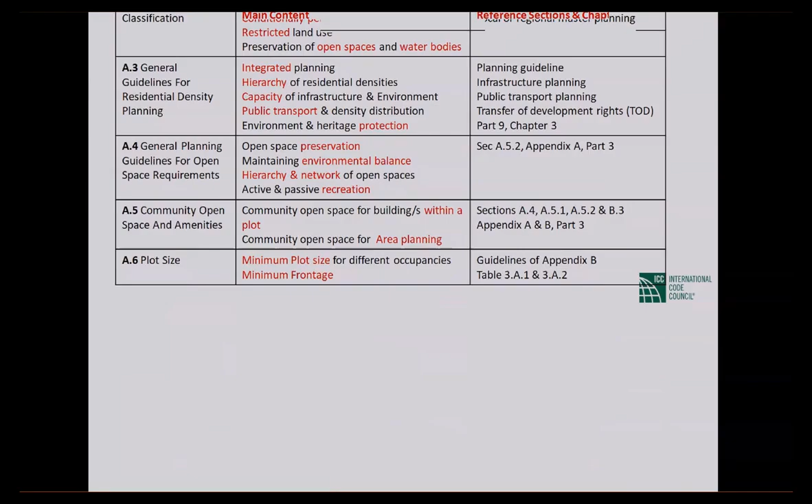But this is a standard procedure, and BNBC works along with other laws of the land and other policies of the land, and they are all in compliance, and it is an integrated component of a larger scenario. So we have a land use policy in our country, and there are different regional and local master plans done by different authorities, government agencies. So the first two sections refer to those references, and we'll go into detail to understand how they refer. So let's go for the discussion of each of the sections in detail.

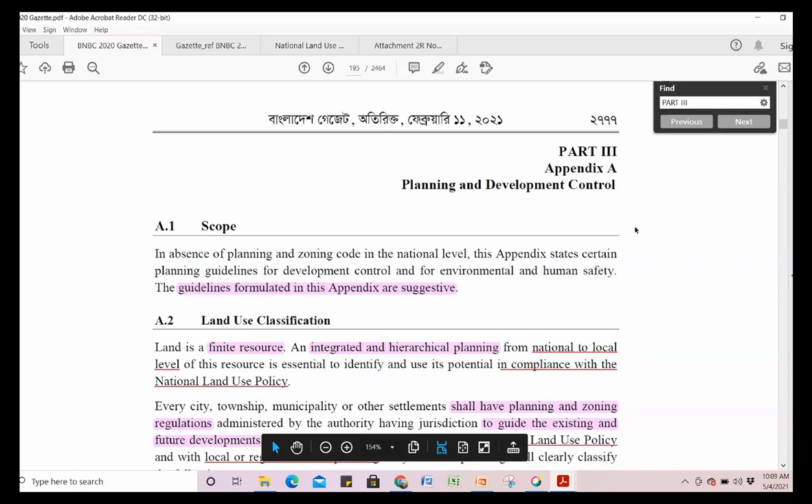So this is Part 3, Appendix A of BNBC 2020. We will be discussing planning and development control. So the scope at the very beginning defines that there should have been a planning and zoning code. Since it is not there, in absence of the planning and zoning code at national level, this appendix states certain planning guidelines for development control and for environment and human safety. The guidelines formulated in this appendix are suggestive. So this is the building code, not a planning code.

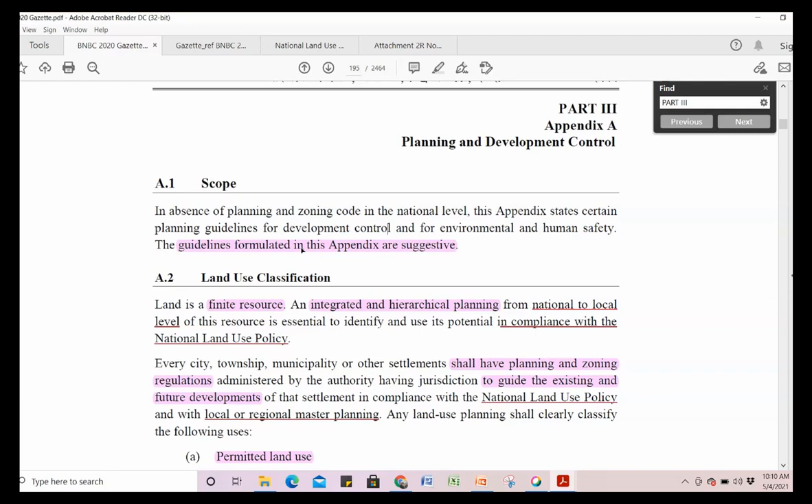And if there had been a planning code here, probably this part would have been covered by the planning code. In absence of that, the BNBC suggests certain guidelines here.

So now about the land use classification. There are a few statements that are very important for a country like Bangladesh. It's quite a populous country with limited resources. So land is one of the resources, and at the very beginning we declared that this is a finite resource. So an integrated and hierarchical planning from national to local level of this resource is essential to identify and use its potential in compliance with the national land use policy.

So this is a primary goal, that we have to use this resource judiciously, and it has to be a very integrated and hierarchical planning, and it has to comply with the national land use policy.

So every city, township, municipality and other settlements shall have planning and zoning regulations administered by the authority having jurisdiction to guide the existing and future developments in compliance with national land use policy and with local or regional master planning.

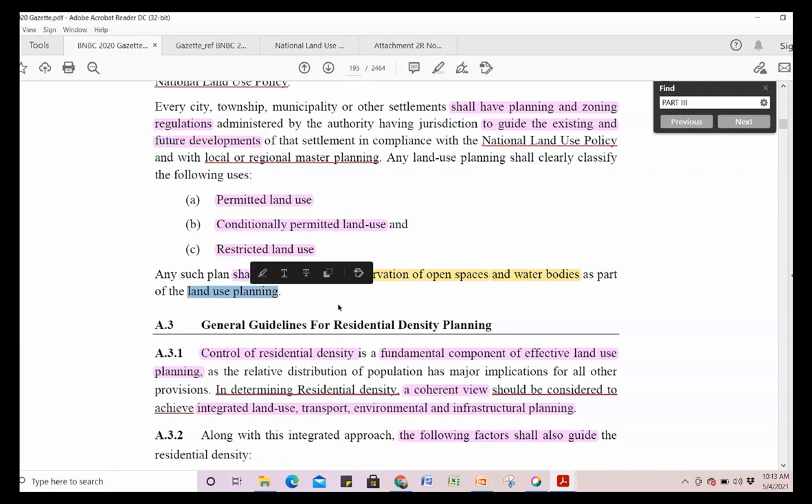So there are three types of uses which are required to be mentioned in the planning guidelines. One is permitted land use, the second one is conditionally permitted land use, and the third one is restricted land use. But that's not all. Any such plan shall also include the preservation of open space and water bodies. So this is an additional criteria that must be met in any land use planning. So this is the basic part of land use classification.

Then we go for the general guidelines for residential density planning. Control of residential density is a fundamental component of effective land use because the relative distribution of population has major implication for all other provisions. So in determining residential density, a coherent view should be considered to achieve integrated land use, transport, environmental and infrastructure planning.

So there must be an integrated approach which will create a balance between transport, environment, infrastructure planning, and residential densities. Along with this integrated approach, the following factors shall also guide the residential density. A, a hierarchy of residential densities should be maintained to ensure diversity of housing needs.

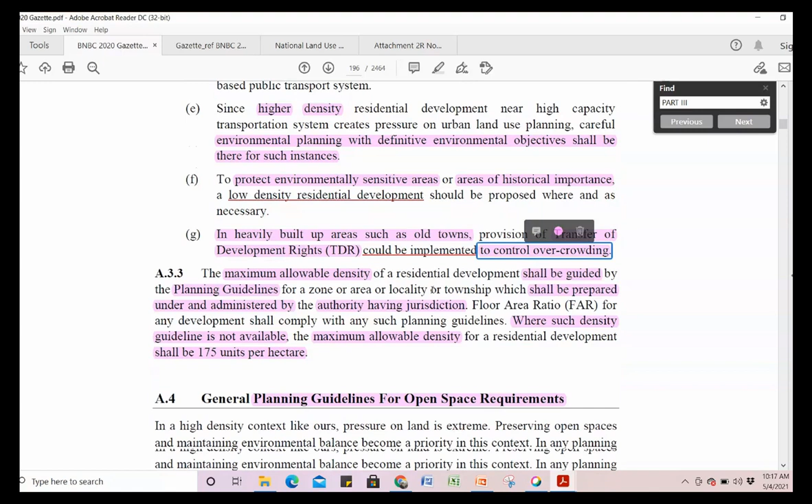So there is an indication of density distribution, where the higher densities will be and where the lower densities will be. In heavily built up areas such as old towns, provisions of transfer of development rights (TDR) could be implemented to control overcrowding. So these are the general guidelines for distributing residential densities, and there is just another guideline for it.

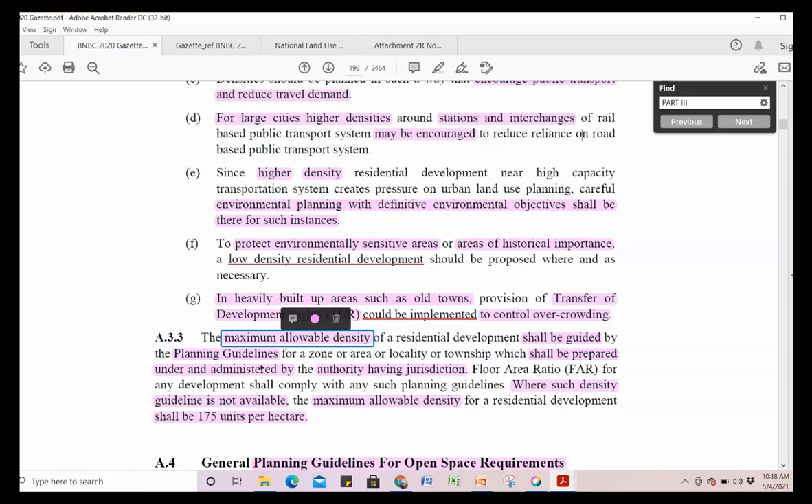The maximum allowable density of a residential development shall be guided by the planning guidelines for a zone or area or locality or township, which shall be prepared under and administered by the authority having jurisdiction. So actually it is the authority having jurisdiction who will decide what will be the maximum allowable density for a locality or for a zone or area or township.

Floor area ratio, FAR, for any development shall comply with any such planning guidelines. Where such density guidelines are not available, maximum allowable density for a residential development shall be 175 units per hectare. So there is a baseline. If we don't have any other guideline present for referring to that development, we will consider this density guideline as a reference for our development.

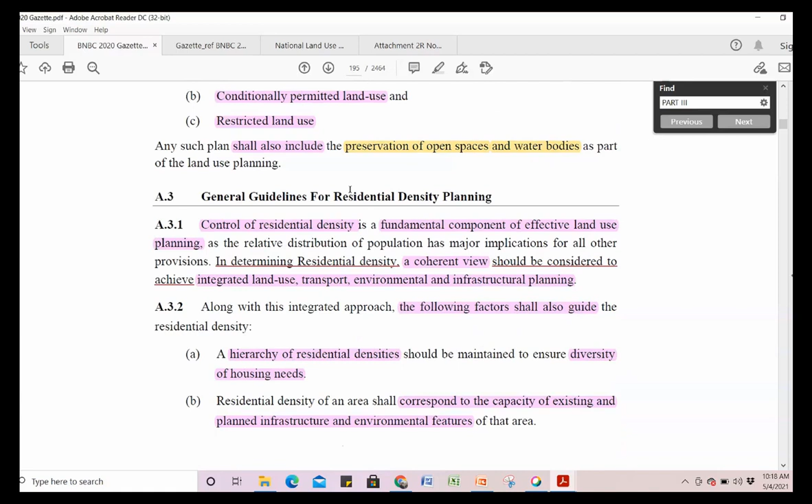So as we all know, these are the density distribution guidelines for residential densities. Now comes the open space guidelines, general guidelines for planning open spaces. I think the whole para makes sense, so I'll go line by line for this part at least.

In a high density context like ours, pressure on land is extreme. Preserving open spaces and maintaining environmental balances become a priority in this context. In any planning process, open space must be planned as a land use in its own right. So although apparently open space is not a dedicated defined land use, here it is stated that open space must be planned as a land use, and not as the remainder after providing the other land uses. So it has to be a focus of the planner while planning the settlement or an area or a master plan.

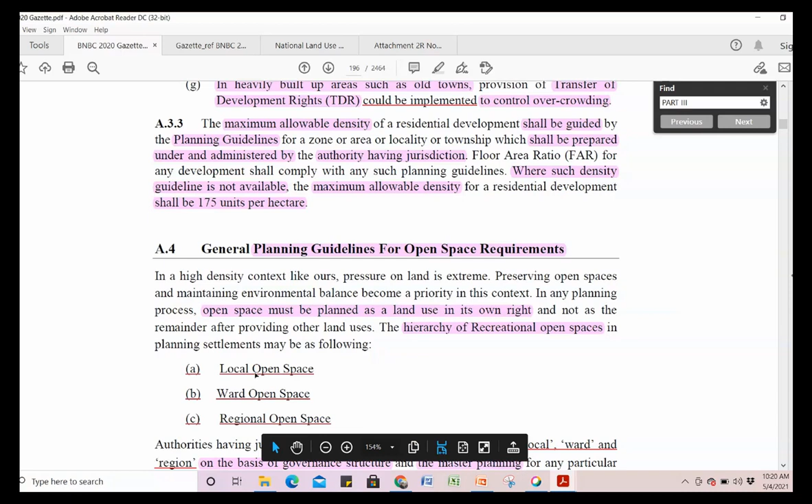The hierarchy of recreational open spaces in planning settlements may be as follows. There are three types of open spaces: local open space, ward open space, and regional open space. Authorities having jurisdiction shall determine the extent of the terms local, ward, and region. So these are a bit flexible. The authority will define which area should be designated as local, ward and region, but it is not totally free. They will do it on the basis of governance structure and the master planning for any particular area. So there are references on the basis of which they will define the extent of a locality, a ward and region.

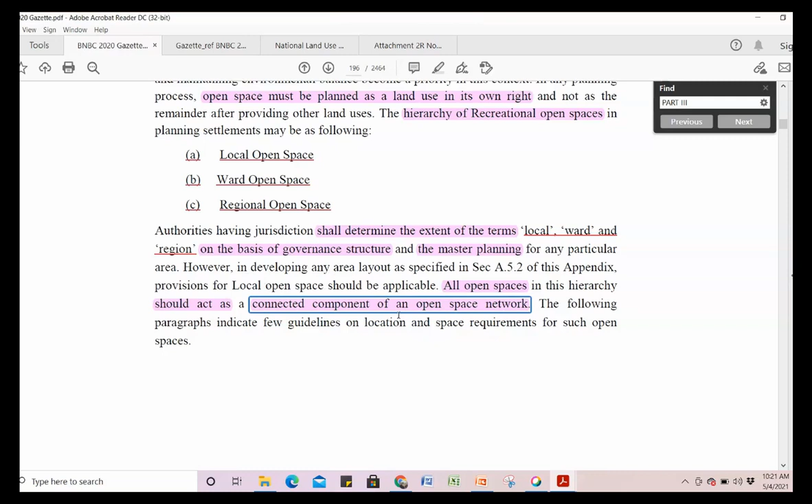So all open spaces in this hierarchy should act as a connected component of an open space network. They are not independent and disconnected, disjointed. They must be planned so that they are also a part of an open space network. That is another guideline for open space requirements. So let's go into detail for each of the open spaces.

For local open space, every locality should have local open space, which is required to meet primarily the passive recreational needs like outdoor sitting, jogging, walking tracks, playgrounds for children, etc. These are all passive recreational needs of the population. Such spaces should be located either within the residential neighborhood or somewhere centrally to serve a wider area of more than one neighborhood. So as we can understand, they are relatively smaller in scale, located within the locality, and there are a few guidelines about the space requirements here.

Considering the projected future population of a locality, and we must notice that it is the projected future population, not the existing population, a minimum requirement of 1 square meter of local open space per locality occupant should be allotted. So this is the basic guideline for a new development. This has to be followed, but where it is already a built-up situation, if possible, such open spaces should be at least 500 square meters. Even in newer localities, it can be a parcel of 500 square meters, or multiple parcels of 500 square meters. So it is suggested that it should be at least 500 square meters or more.

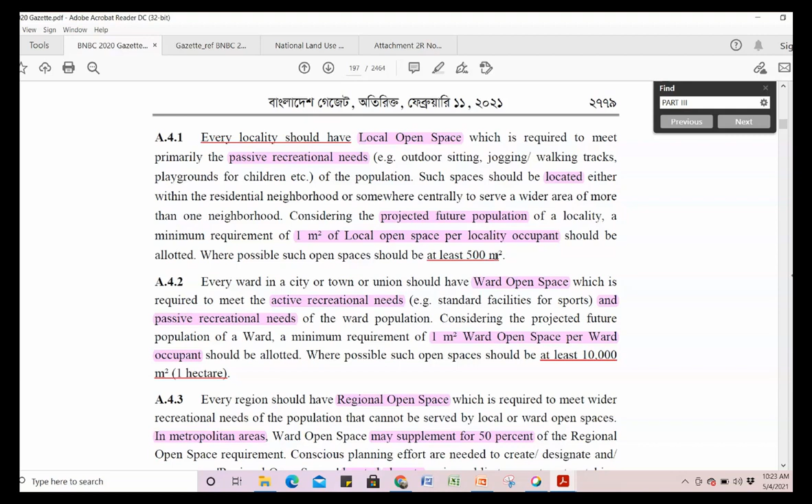So what is ward open space? Every ward in a city or town or union should have ward open space, which is required to meet the active recreational needs, that is standard facilities for sports, and also passive recreational needs for the ward population. So in the hierarchy, it is a bit larger space for the whole ward, and the space requirement is similar. It is 1 square meter of ward open space per ward occupant, and 10,000 square meters or 1 hectare is the minimum size for ward open space.

And for the regional open space, every region should have regional open space, which is required to meet wider recreational needs of the population that cannot be served by local or ward open spaces. In metropolitan areas, ward open spaces may supplement for 50% of the regional open space requirement. So it is a flexibility and exception that in metropolitan areas, ward open space and regional open space may overlap. They can supplement each other.

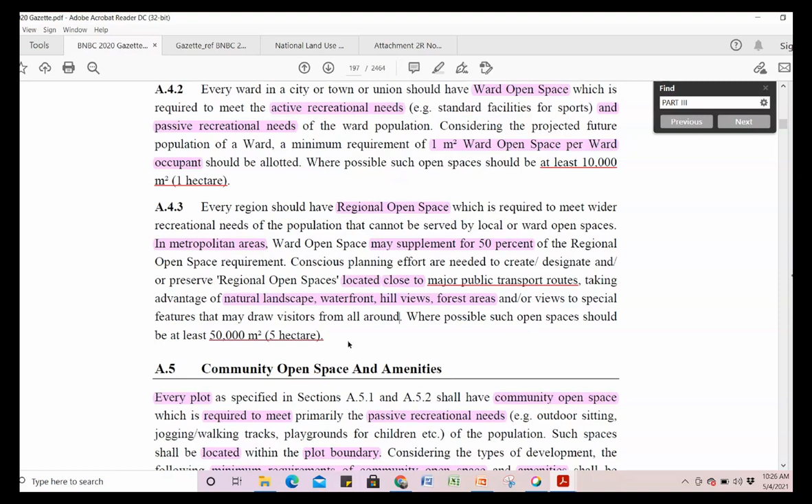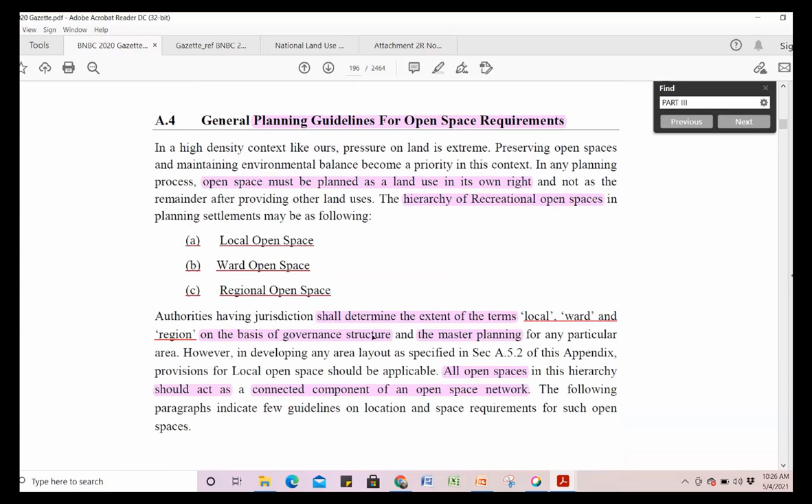So they are also serving our recreational purposes, but of a different kind, not served by the local open space or ward open space. Where possible, such open spaces should be at least 50,000 square meters, 5 hectares. This is the minimum size. Of course, it can be much larger. So these are the 3 types of open spaces which should be placed in a hierarchy for a larger planning scenario. Now comes the open space criteria within a plot.

It is community open space and amenities. So every plot as specified in sections A5.1 and A5.2 shall have community open spaces which are required to meet primarily the passive recreational needs, outdoor sitting, jogging, walking tracks, playgrounds for children of the population. Such spaces shall be located within the plot boundary. So this is about each individual plot development.

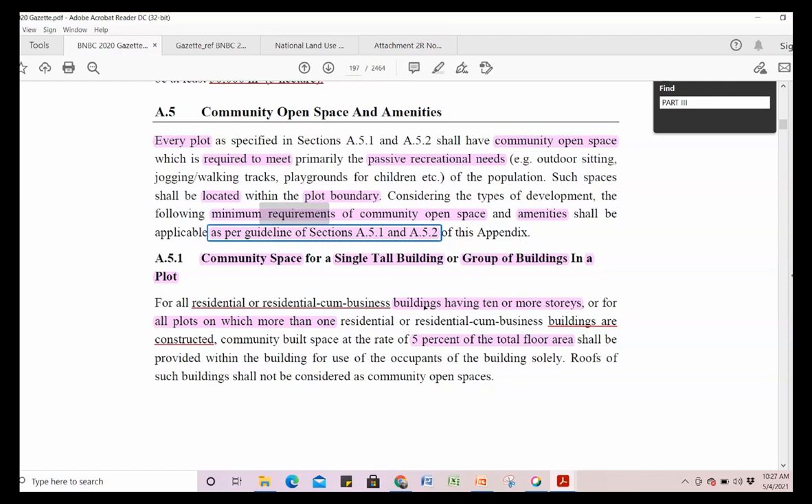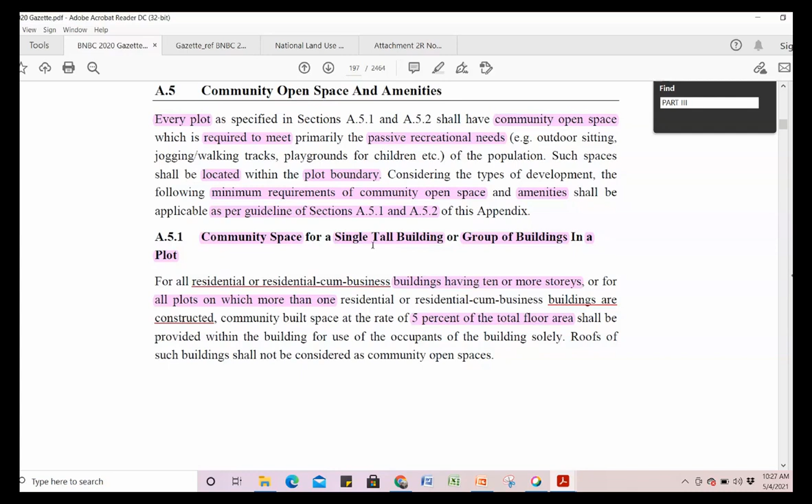Considering the types of development, the following minimum requirements of community open space and amenities shall be applicable as per guidelines of these sections. So let's go through the sections. A.5.1, community open space or community space for a single tall building or group of buildings in a plot. For all residential or residential cum business buildings having 10 or more stories, or for all plots on which more than one residential or residential cum business buildings are constructed, community built space at the rate of 5% of the total floor area shall be provided within the building for use of the occupants of the building solely. Roofs of such buildings shall not be considered as community open space.

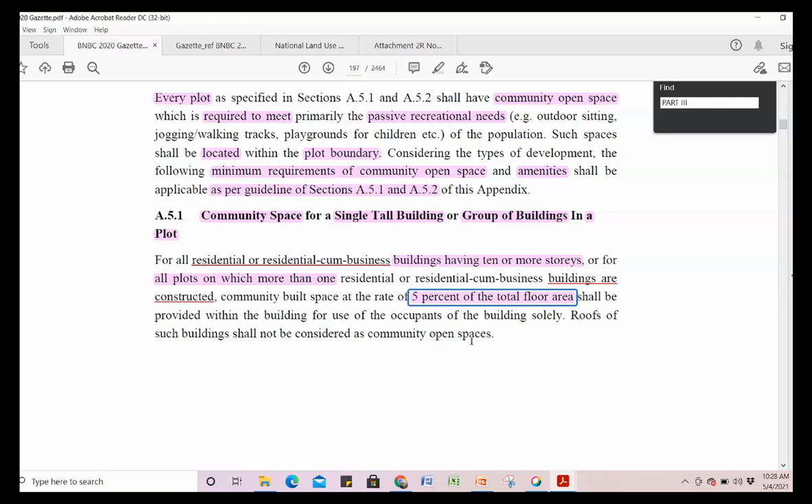So this is mostly focusing on a plot and tall building or relatively higher density development or mixed use development. So that is the guideline for the community open space for such developments. For residential or residential cum business plots measuring more than 0.1 hectare. So there is a size mentioned. These are relatively larger plots. So 0.1 hectare, it has to be more than 0.1 hectare.

10% of the area of land or 1 square meter per occupant of the plot, whichever is larger, shall be left vacant for use as a children's playground. This playground shall be contiguous and shall have a length not exceeding 2.5 times its width. The playground may extend into the mandatory open space of the lot. So relatively larger plots will have a different guideline for community open space, and that is guided by two criteria. One is 10% of the area of the land or 1 square meter per occupant, whichever is larger, will be needed for community open space. And this particular open space can overlap with the mandatory open space or setback areas.

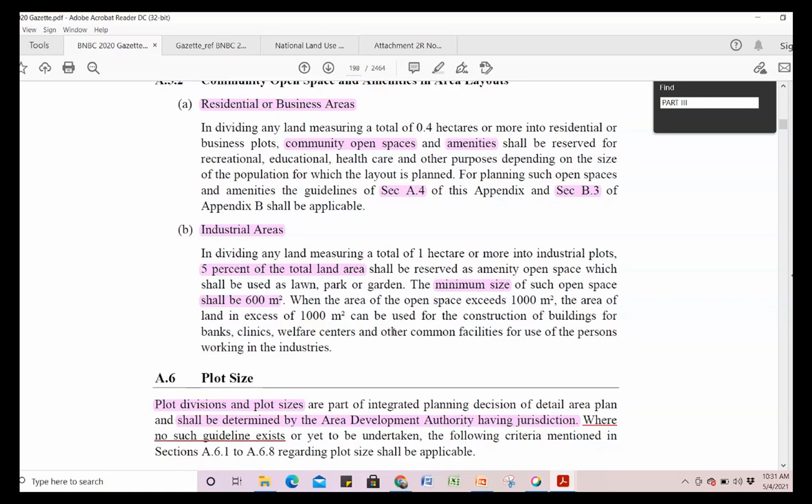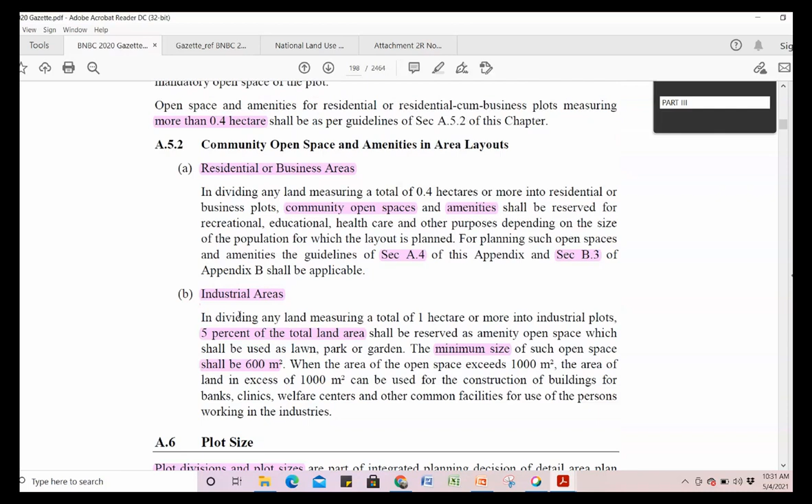Where the area of the open space exceeds 1000 square meters, the area of the land in excess of 1000 square meters can be used for the construction of buildings for banks, clinics, welfare centers, and other common facilities. So there are two separate guidelines for larger plots: one is for the residential and business situation, and the other is for the industrial situation. So that ends the planning part.

Now we are going to individual plot size. So plot divisions and plot sizes are part of integrated planning decisions and shall be determined by the area development authority having jurisdiction. Where no such guidelines exist or are yet to be undertaken, the following criteria mentioned in sections A6.1 to A6.8 regarding plot sizes shall be applicable. So about the residential plots,

Something is wrong with this color. Okay, it's here now. So A1 relates to 66 square meters, A2 133 square meters, and A3 is 200 square meters. This is the minimum size of the plot respectively. And they also have to have some road frontage.

Can you see the presentation? I think that there are some glitches here. Okay, I'll just stop the screen share for a moment and we'll come back quickly. Well, I think it should be okay by now.

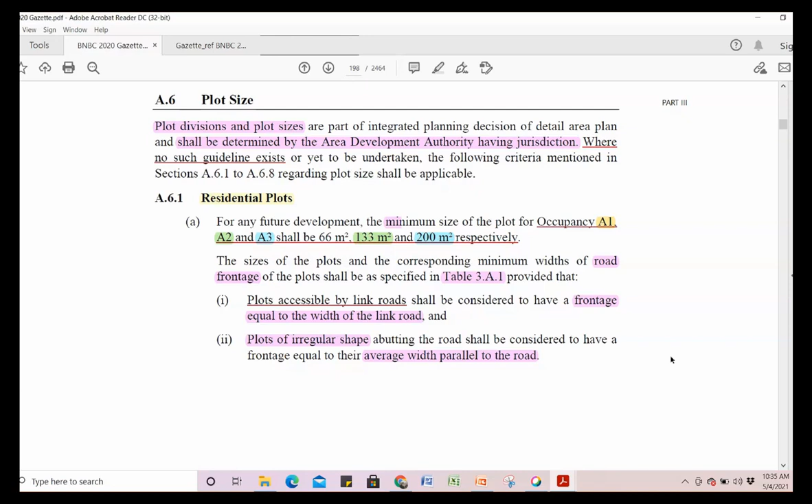So this is, yeah. So these are the three occupancy types and their respective plot areas, which are to be abided by. And for road frontages, we have to consult table 3.A.1. It is provided there for different plot sizes. We'll go through it. It is just below.

So there are a few additional criteria. These are that plots accessible by link roads shall be considered to have a frontage equal to the width of the link road. Plots of irregular shape abutting the road shall be considered to have a frontage equal to their average width parallel to the road. Okay.

The other criteria are that limitations of plot sizes and frontages imposed in A6.1 above may be waived for the approved affordable housing, including site and service scheme. So this is an exemption for approved affordable housing and site and service scheme. The limitation of plot size and frontages may be waived, but there are other guidelines that will decide how much waiver they will get, and that is given in Appendix B.

The minimum size of the plot for a group housing development scheme and other special requirements for group housing developments shall be as specified or approved by the respective city development authority. So the final guideline for plot size is that for minimum standard transitional housing, government may allow smaller plots following the guidelines mentioned in Appendix B.

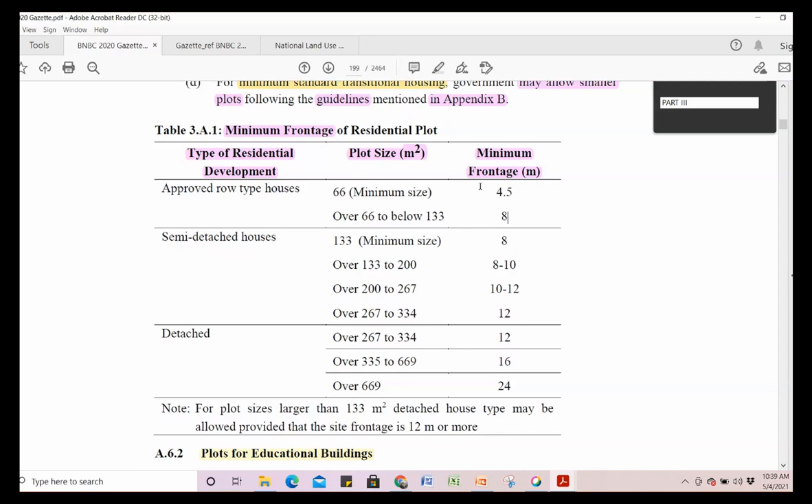So there are three types of residential development: approved row type, semi-detached type, and detached type. There are plot sizes defined for that. Minimum plot size should be 66 square meter, and this particular typology is approved up to 133 square meter, and the required road frontages are 4.5 meter and 8 meter. So this is the basic structure, and it is given for other typologies as well. We are not going into detail, just we should look at the footnote.

Here is a flexibility. As you can see, for semi-detached house there is a minimum size. For approved row house there is a minimum size. But for detached house it is not mentioned whether there is a minimum size or not. So there is a note about it here: that for plot size larger than 133 square meter, detached housing type may be allowed provided that the site frontage is 12 meter or more.

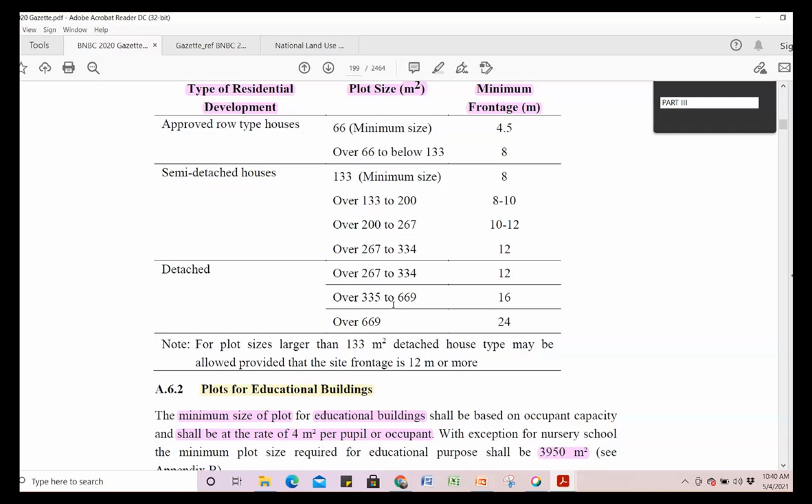So if the site frontage is 12 meter or more, detached housing type may be allowed for plots larger than 133 square meter. So that was applicable for residential buildings.

Now plots for educational buildings. Minimum size of the plot for educational buildings will be based on occupant capacity and shall be at the rate of 4 square meter per pupil or occupant. The minimum plot size shall be 3,950 square meter. Further elaboration is given in Appendix B.

Plot for assembly halls, theatres and cinemas. Minimum size of plot for assembly halls, theatres, cinema halls and other similar buildings where people will gather for entertainment or public functions shall be based on the seating capacity of the building and shall be at the rate of 3 square meter per seat. So there is a table below, table 3.A.2, that gives some more elaboration on this topic.

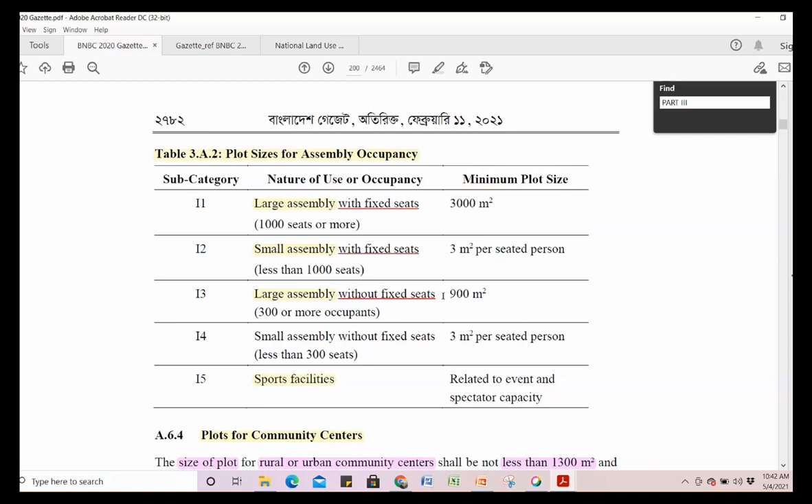This is the table where the subcategories of occupancy I are given. There were 5 subcategories: large assembly, small assembly, large assembly without fixed seats, small assembly without fixed seats, and sports facilities, and the basic standard is 3 square meter per seat. But for sports facilities there are 2 components here. One is related to the event, that is the sports field or area dedicated for sports, and the other is spectator capacity. Spectator capacity will be determined by 3 square meter per seat again. So that is the plot size for sports facilities and assemblies.

For community centers in rural or urban areas, the minimum size of the plot will be 1300 square meter. For business and mercantile plots, the minimum size will be 200 square meter with a road frontage of not less than 10 meters.

So 2 criteria are applicable for business and mercantile plots. One is the road frontage, that should not be less than 10 meter, and the minimum size of the plot will be 200 square meter. For industrial plots, the minimum size of the industrial plots shall be 300 square meter. Road frontage shall not be less than 15 meter. So it needs a higher road frontage, and the minimum size will be 300 square meter.

Petrol and filling stations, the minimum size of the plot will be 500 square meter, and the road frontage shall not be less than 30 meters. The minimum size of the plot for petrol station with service bay but without repair workshop shall be 1100 square meter, and the road frontage width shall not be less than 30 meters. So there are 2 options. One is with service bay but without repair workshop, and the other is without service bay and repair workshop. So there are two provisions for that.

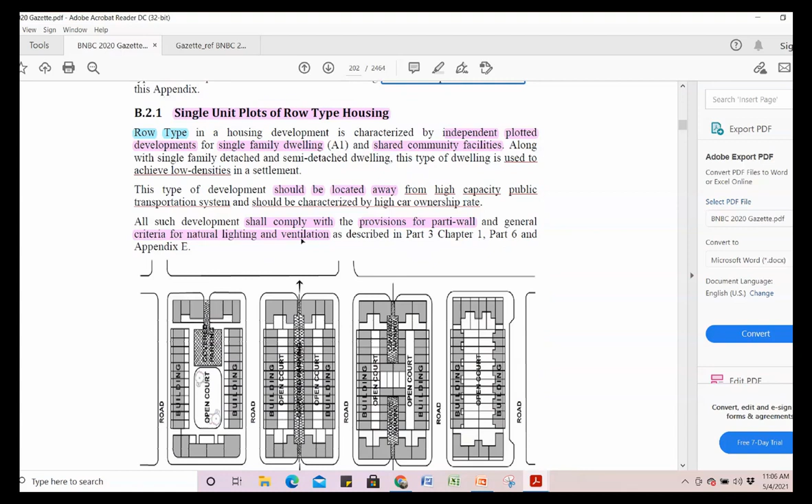So now the elaboration of each type. Single unit plots of row type housing. Row type housing is a housing development characterized by independent plotted development for single family dwelling A1 and shared community facilities, along with single family detached and single family semi-detached dwelling. This type of dwelling is used to achieve low densities in a settlement. So these are the low density development tools for housing.

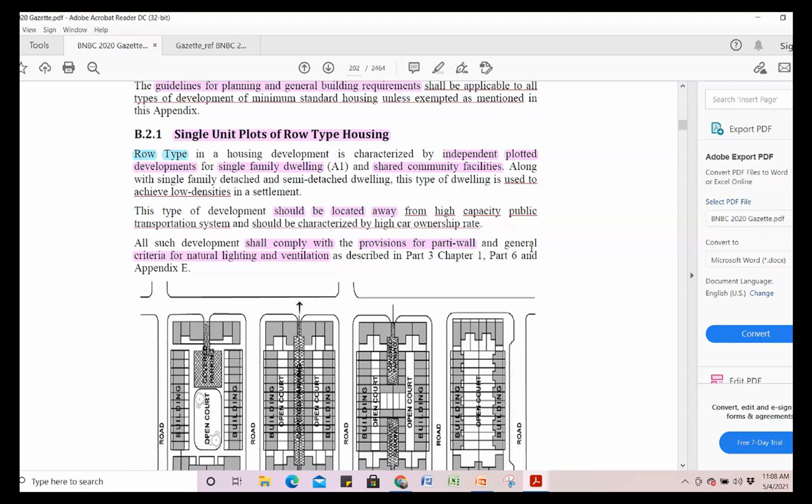This single unit plots or row type housing. This type of development should be located away from high capacity public transportation system and should be characterized by high car ownership rate. As it is a relatively low density development, there is a locational suggestion that it should be located away from high capacity public transportation system and will better be served by high car ownership, so that people will have individual mobility. And of course there will be other public transportation system, but not high capacity public transportation systems.

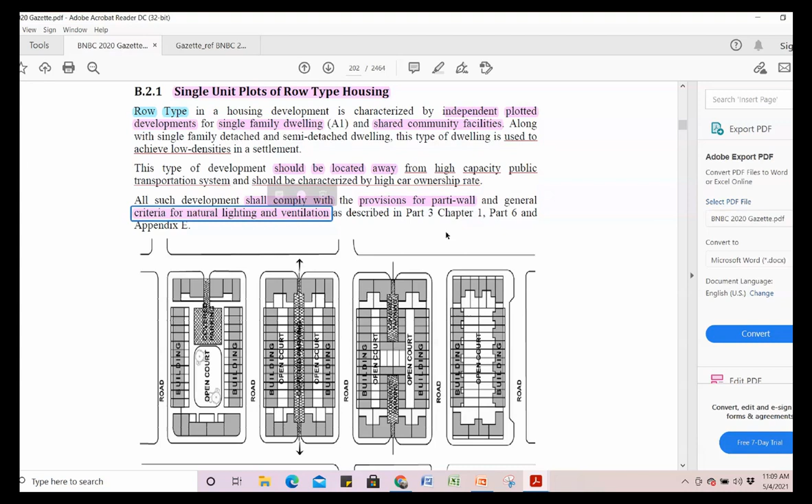So all such developments shall comply with the provisions for parti-wall, a new term for us. We will go through it in the later phase. The party wall will be discussed in further elaboration, and general criteria for natural lighting and ventilation. Since it is dealing with shared wall situation, which is called party wall, there will be additional care for party walls and for ensuring natural lighting and ventilation as described in this code.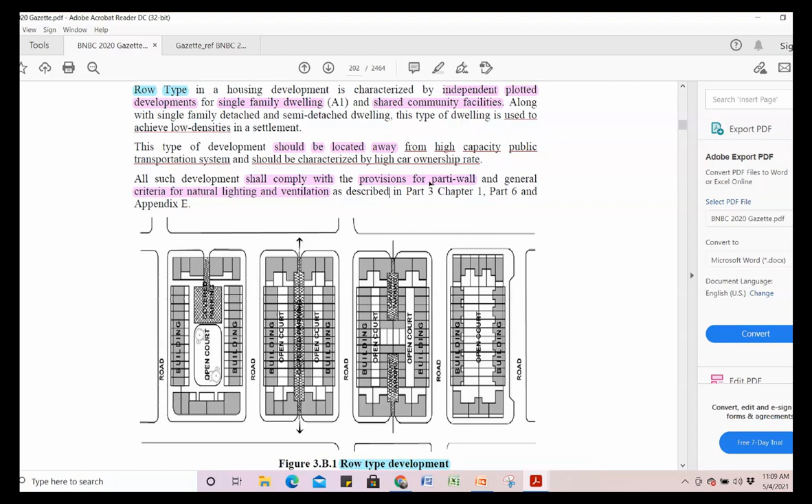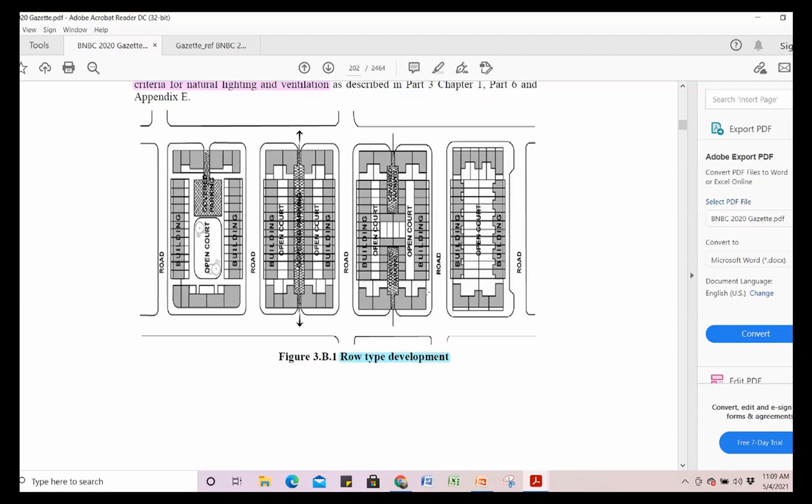So there are few references, Part 3 Chapter 1, Part 6, Appendix E. So they all deal with the construction and natural lighting and ventilation. Those guidelines will be complied by. So this is the general outline for row type development. The grey area, mainly built area. The white area is open spaces and the hatched area is for parking situations. So there might be many possible alternatives for this typology. This is just a suggestive outline.

For multi-storied flats of row house type, but they are not plotted development like the previous one. Here the undemarcated, undivided land is shared by the flat owners within the complex. So this is a different type of development, another row type development, but multi-storied, and it is on a shared, undivided, undemarcated land. Houses or flats or apartments in multi-storied row type development shall share walls with adjacent flat or apartment, provided that they are designed and built at the same period as part of the same project, and also that they fulfill the general criteria of natural lighting and ventilation.

Multi-storied row type development should be permitted for walk-up apartments, A3, as well as two-family dwellings, A2, with many of the community facilities at lower levels. Such developments are good for medium density. So the first one was good for lower density. This will have a little bit more density, medium density.

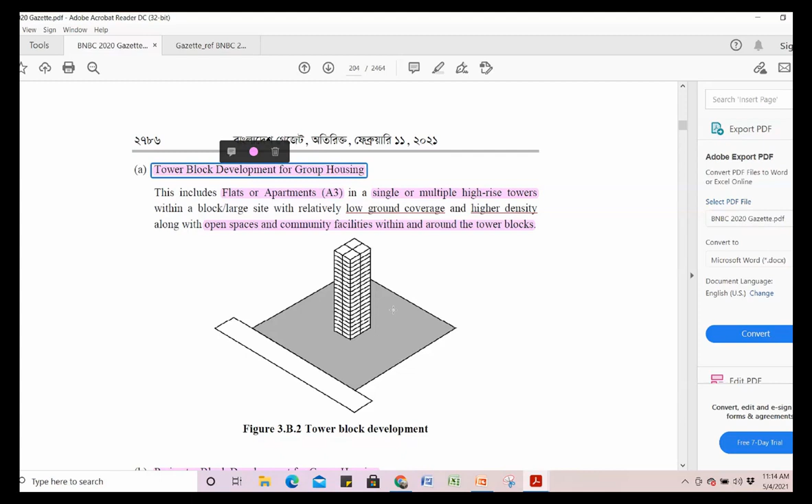All such residential developments can be mixed with other permitted occupancies. So a mixed use is suggested here to encourage availability of all services within closer proximity and also to support growth of local economy. So there are two objectives for using this mixed pattern. All such developments can be subdivided into following two categories. One is tower block development for group housing, and another is perimeter block development for group housing.

As it is evident from the titles, the tower block includes the flats or apartments A3 in a single or multiple high-rise towers within a block, or large site with relatively low ground coverage and higher density, along with open spaces and community facilities within and around the tower blocks.

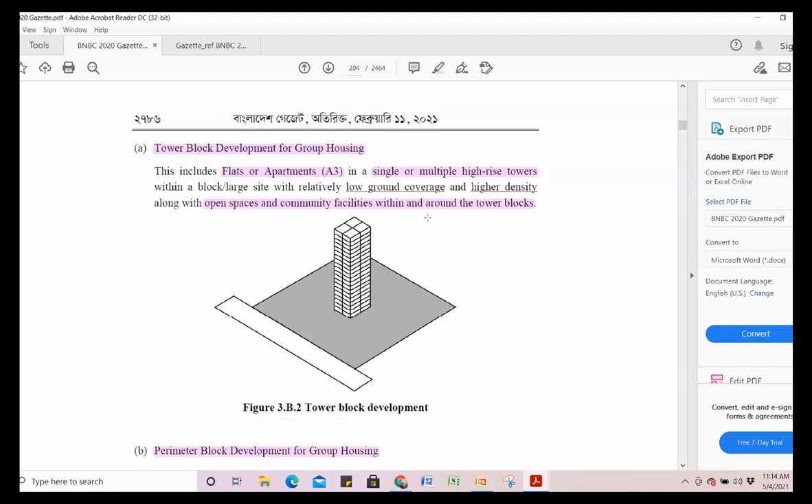So what is perimeter block development? Unlike tower blocks, perimeter block development involves one single building or multiple buildings placed along the perimeter of the site to create an internal open space shielded from the surrounding, commonly used as a community space. Each housing unit in such developments shall have at least two sides open, one at the internal open space, the other at the external road side.

Depending upon the plot size and population, such development may also be permitted to become high-rise developments, provided that the internal open space conforms to the minimum requirements of a courtyard. So there are guidelines for courtyard in Part 3 Chapter 1. If it conforms to that, this typology can become taller.

So this is the block development. Now comes the cluster type. The cluster type development is very much suitable for accommodating low to high density of population within walk-up range. Cluster type development for group housing should be permitted for all ranges. So A1, A2, A3, A4, for all ranges they will be permitted.

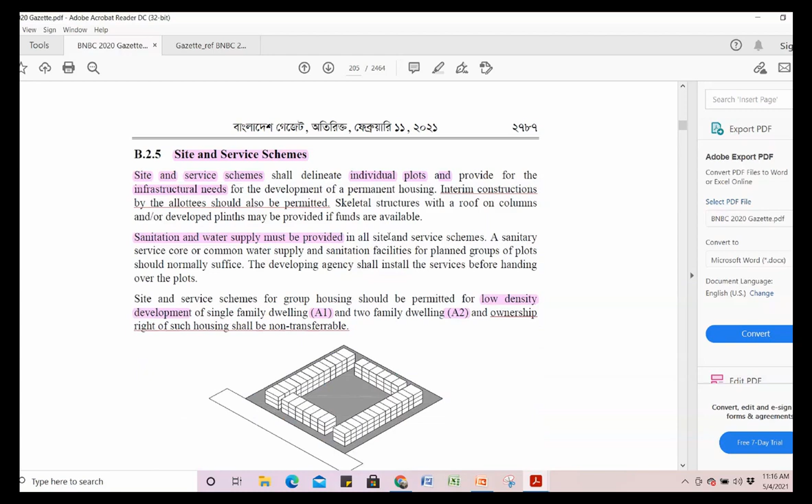Details of this typology has been discussed in Appendix D. So there will be another appendix for detailing out the cluster housing. We'll go there and we'll have more detailed understanding of cluster housing there later on.

So finally, the site and service schemes. Site and service schemes shall delineate individual plots and provide for the infrastructural needs for the development of permanent housing. Interim constructions by the allottees should also be permitted. Skeletal structures with a roof on columns or developed plinths may be provided if funds are available. So this is the general description of a site and service scheme.

Sanitation and water supply must be provided. So this is a priority. The sanitation and water supply infrastructure is a must for site and service scheme, even prior to the building components. A sanitary service core or common water supply and sanitation facilities for planned groups of plots should normally suffice.

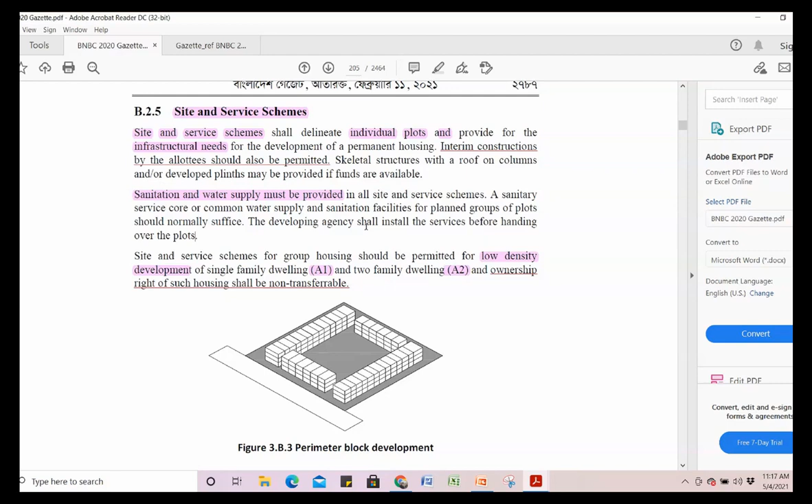The developing agency shall install the service before handing over the plots. So that is a condition that must be met, that the owner will receive the plots with the services. Site and service scheme for group housing should be permitted for low density development of single family housing and two family housing, and ownership right of such housing shall be non-transferable. So there is an extra criteria for ownership here.

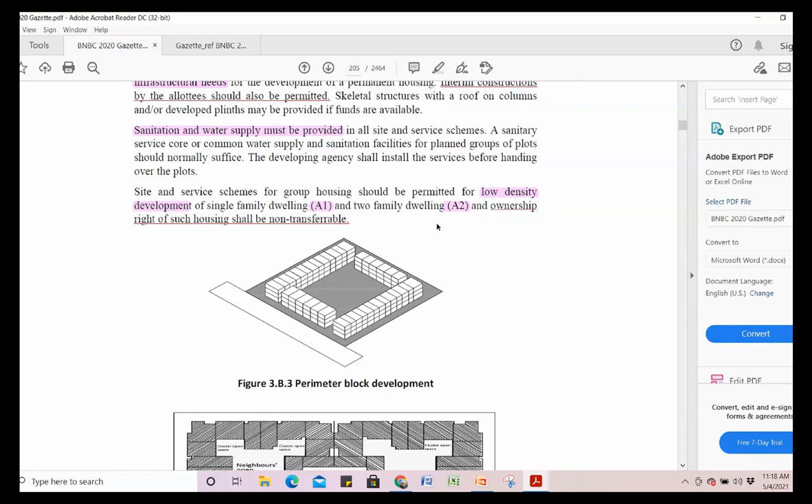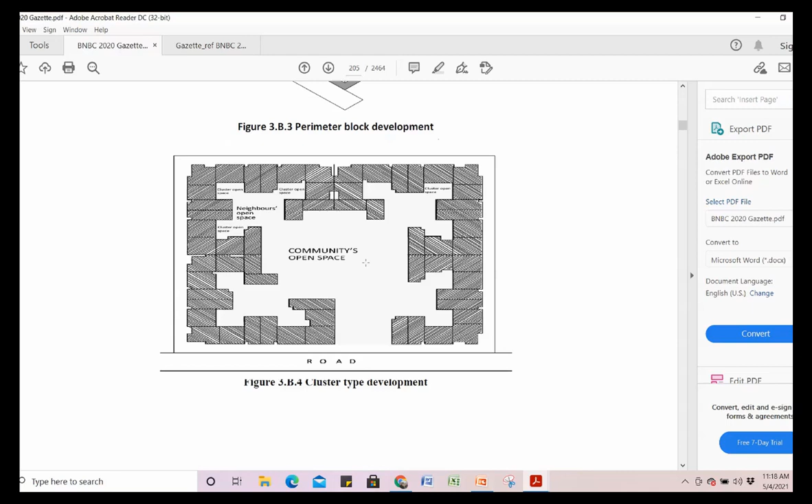These are the diagrams for different types of developments, that is for perimeter block development, units placed along the perimeter, creating a central open space, units having two sides open and the other side shared. One is the internal side and the external side. Cluster type development will be organized in clusters with different spaces in between. So that is the cluster type development.

So now comes the planning part. A minimum standard housing shall ensure quality living. Actually, the main target is to make a comprehensive planning, and this comprehensive planning must ensure the environmental quality, social and utility infrastructure, educational facilities, healthcare, recreational facilities, connectivity to commerce, and job locations. It has to be a very comprehensive planning for such minimum standard housing.

About the density, housing density shall be decided by the authority for such developments in accordance to the detailed area plan, if they have one. Where such guidelines are unavailable, gross density of a minimum standard housing will not be more than 175 units per hectare. So if the detailed area plan suggests something else, it will be followed through, but if there is no such guidelines, it will be 175 units per hectare, considering an average population of 5 persons per dwelling units.

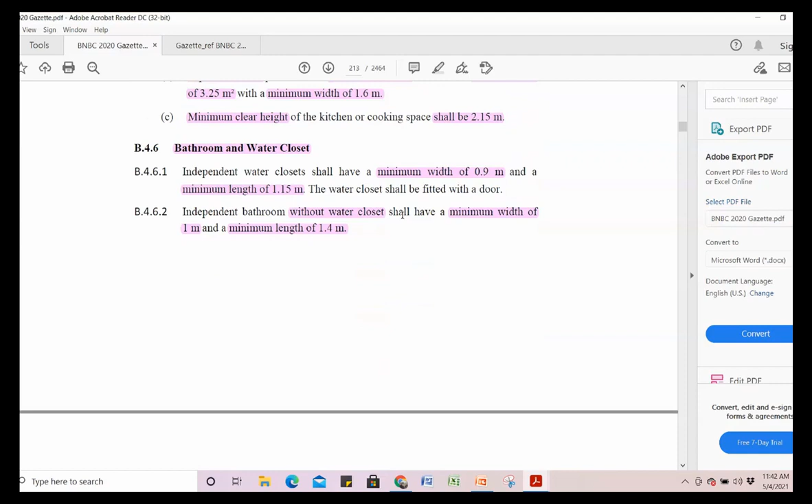So there are guidelines for kitchens. General guideline will follow Part 3, Chapter 1. For the other guidelines, there are a few exceptions for minimum standard transitional housing. I'm not going into the details of them, but they basically contain 2 types of information. One is the area of the... so this is the guideline for the kitchen and some exceptions for minimum standard transitional housing. There are bathroom and water closet area requirements. These are basically standards containing the area and the minimum width for each of the functionality. That's more or less similar.

Balcony and corridor, there are a few guidelines for the minimum width requirement. For stair, all components are referred to Part 3, Chapter 1, and there are a few important issues like water supply. Let's go through it. One water tap or hand tube well pump per dwelling unit should be provided if feasible. Each unit of public water hydrants or community hand pumps, if provided in lieu of the individual water supply, shall serve not more than 10 dwelling units and shall not be further than 15 meter from any dwelling unit served.

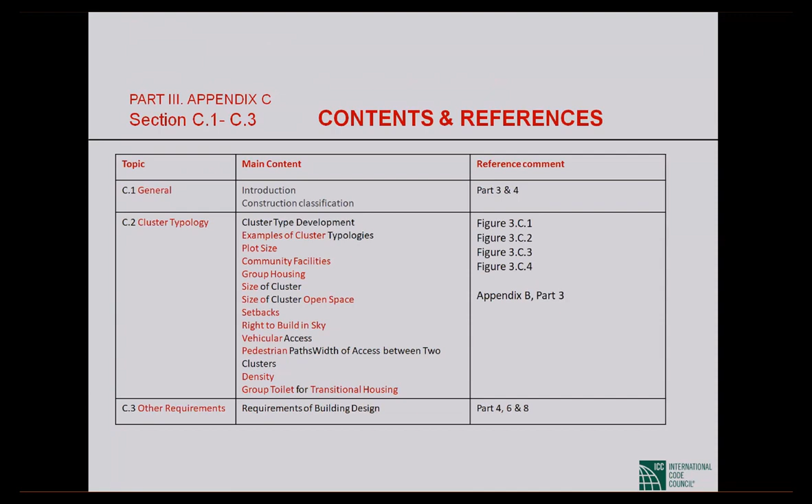Actually, we are running behind the schedule, so let's start with the next segment, segment 3. It covers 2 appendices. One is Appendix C, the other is Appendix E. We'll start with the Appendix C, Special Requirements for Cluster Planning, containing 3 segments, the details of which we'll discuss along the path. So let's go to the detail first.

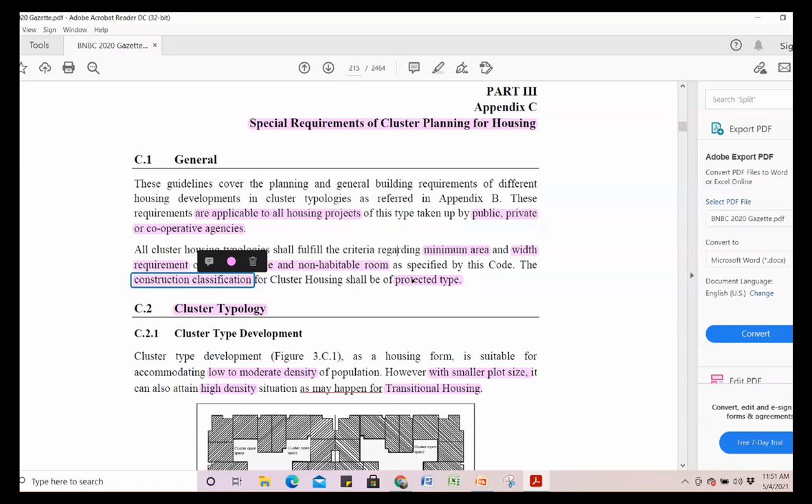This is Appendix C. It is special requirement of cluster planning for housing. They are applicable to all housing projects, public, private, cooperative agencies, whoever the developers are. There will be guidelines for minimum area and width requirement of each habitable room and non-habitable room. The construction classification of cluster housing shall be protected type. That is a vital information here. So there is a guideline about construction classification.

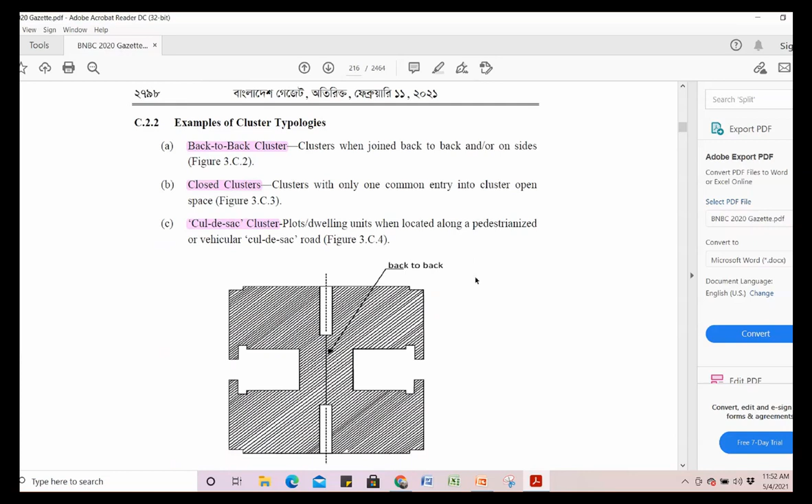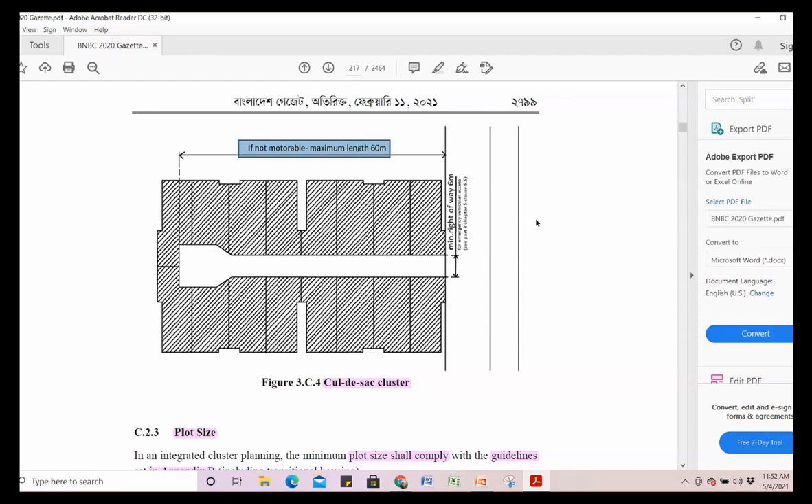Cluster typology: it is a suitable typology to accommodate low and moderate density housing. With smaller plot size, it can also attain high density, which may happen to transitional housing. This is a general outline of a cluster housing. There are few typologies described here. Cluster can be back-to-back, closed cluster, cul-de-sac cluster. So there are few diagrams here explaining those clusters, and there are few reference limits as well, like this one, that how long the pathway or roadway can be for such developments.

Plot size. In an integrated cluster planning, the minimum plot size shall comply with the guidelines of Appendix B. So it refers to Appendix B. Community facilities shall be provided with the requirement of neighborhood and community facilities. All housing shall be provided with this. In such cases, the authority may allow FAR of 2 with 100% ground coverage, provided that the basic natural lighting and ventilation criteria is met through the two exterior sides, both having exposure to the adjacent neighborhood spaces.

Group housing may be permitted in the form of cluster housing. However, dwelling units with plinth areas up to 20 square meter should have scope for adding habitable rooms. Group housing in a cluster should not be more than 15 meter in height. So there is a height limit. Size of cluster: single to two stories, not more than 20 houses in this kind of development should be grouped in a cluster. That is the basic module of a cluster that is suggested here. Cluster with more dwelling units may create problem relating to identity, encroachment, and maintenance. So this is the primary reference for the size of the cluster.

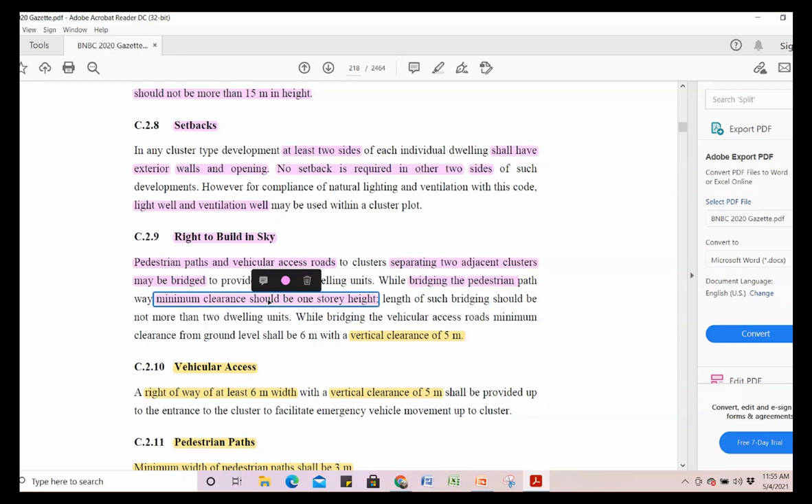Right to build in sky: pedestrian paths and vehicular access roads to clusters separating two adjacent clusters may be bridged. So there is an option to build above the roads or pedestrian paths. While bridging the pedestrian, a minimum clearance should be 1 story height. The vertical clearance will be 5 meter. Vehicular access: the right of way will be 6 meter width and the vertical clearance height will be 5 meter. Pedestrian paths minimum width will be 3 meters.

Width between two clusters: built area of dwelling unit within cluster shall have no setbacks from the path or road, and the pathway will be minimum 3 meter and the vehicular road will be minimum 6 meter wide.

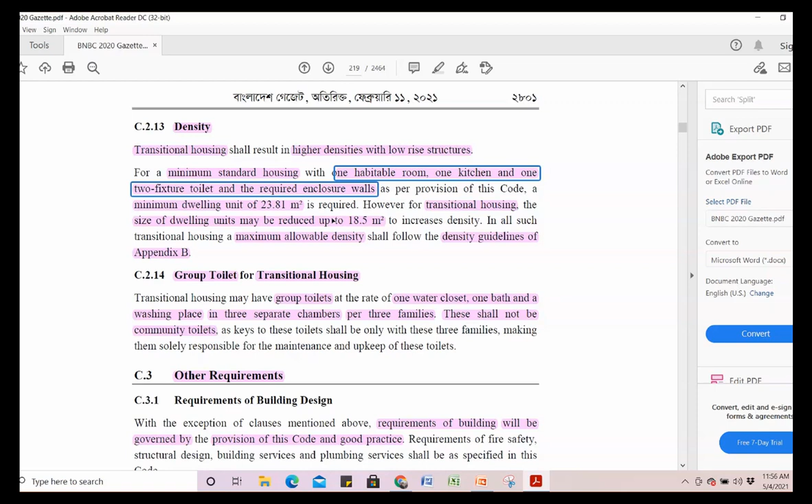Density: transitional housing shall result in higher densities with low-rise structures. For a minimum standard housing with 1 habitable room, 1 kitchen, 1 2-fixture toilet, and the required enclosure walls, as per provision of this code, a minimum dwelling unit of 23.8 square meter is required for a cluster type. However, in transitional housing, the size of the dwelling may be reduced up to 18.5 square meter.

So there is a density guideline in Appendix B that must be followed also. Group toilet for transitional housing. So there is a provision of group toilets. Transitional housing may have group toilets at the rate of 1 water closet, 1 bath, and a washing place in 3 separate chambers.

This is important because they cannot be located in one single chamber or 2 chambers. There must be 3 separate facilities per 3 families. This shall not be community toilets. There is another criteria. Although they are shared, they are not community toilets. They are shared for the 3 families only.

As keys to these toilets shall only be with these 3 families, making them solely responsible for the maintenance and upkeep of these toilets. So the service infrastructure can be shared, but it has certain guidelines or criteria to meet. The other requirements of the building will be governed by the other parts and chapters of this code, and by good practice.

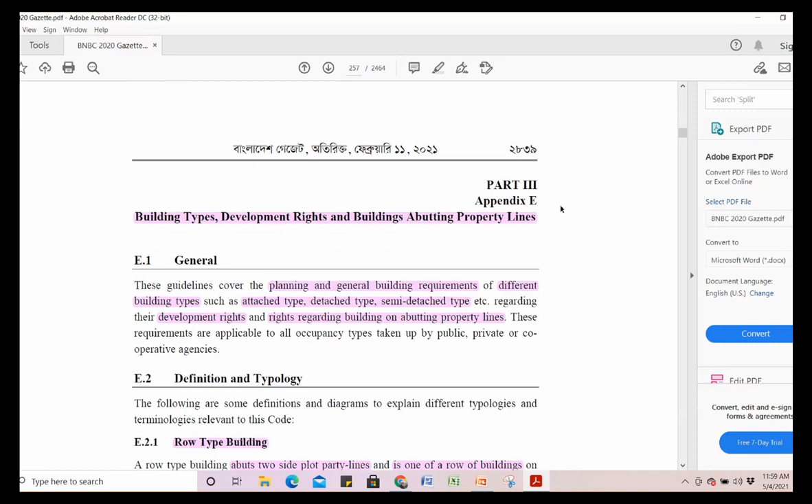So this segment, sorry, the Appendix C, and we have the final Appendix E to cover. So let's go for Appendix E directly, since we have a shortage of time. So this is Appendix E. Generally, the Appendix E has 4 sections, and the details of which are like this, and the references are like this.

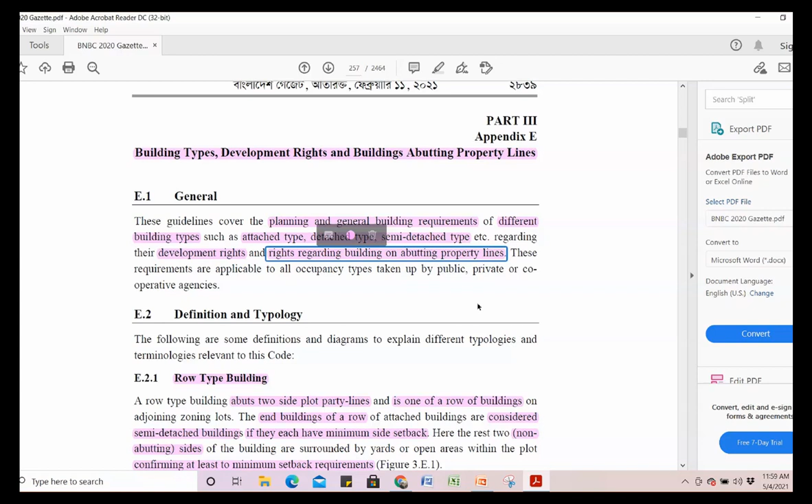So let's go for the appendix in detail. It is about building types, development rights, and building abutting property lines. These guidelines cover the planning and general building requirements of different building types, such as attached type, detached type, semi-detached type, etc., regarding the development rights and building on abutting property lines. So this is the general orientation.

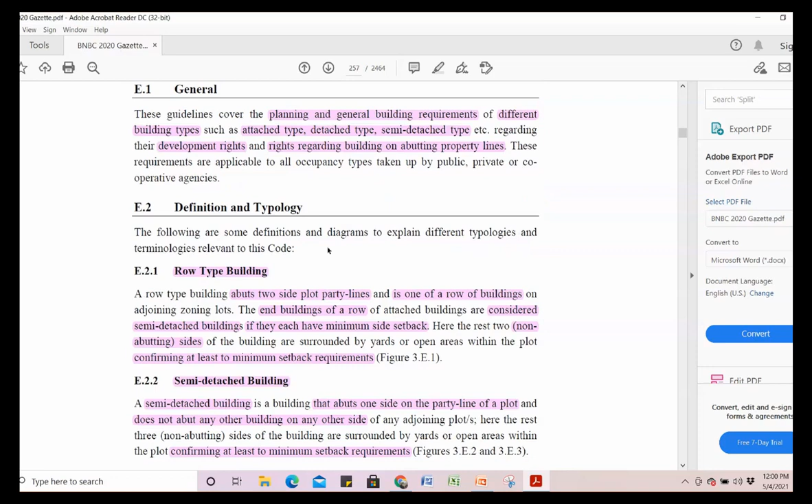Definition and typologies. There are few types here: row type of building, semi-detached building, detached building. We can go through the diagrams and have an idea quickly. Row type has walls abutting the property line and 2 sides open within the plot, maintaining the setbacks. Let us go to the definition.

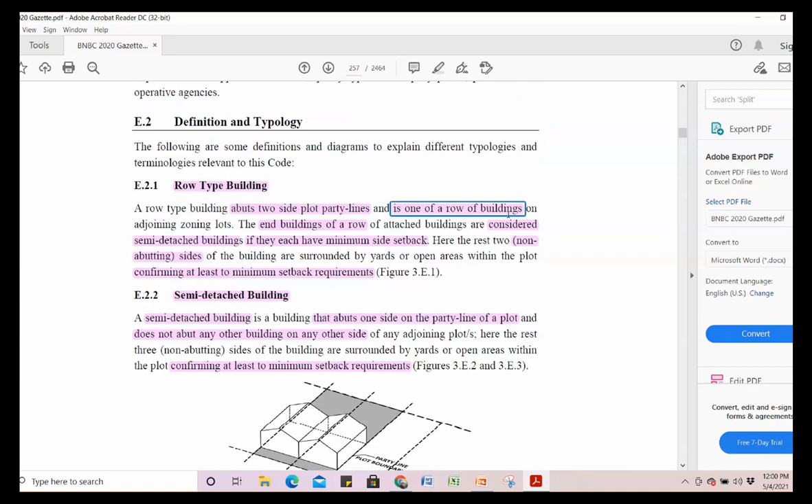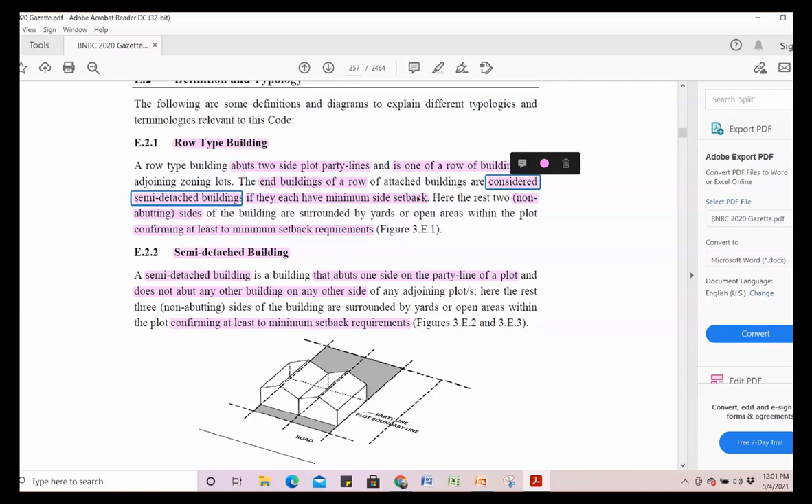A row type building abuts 2 side plot party lines and is one of a row of buildings on adjoining lots. So it is not a single independent development, it is a development of a series building activity. The end buildings of a row of attached buildings are considered semi-detached buildings if they each have minimum side setbacks. So at the end of the row, how it will end has a clue here.

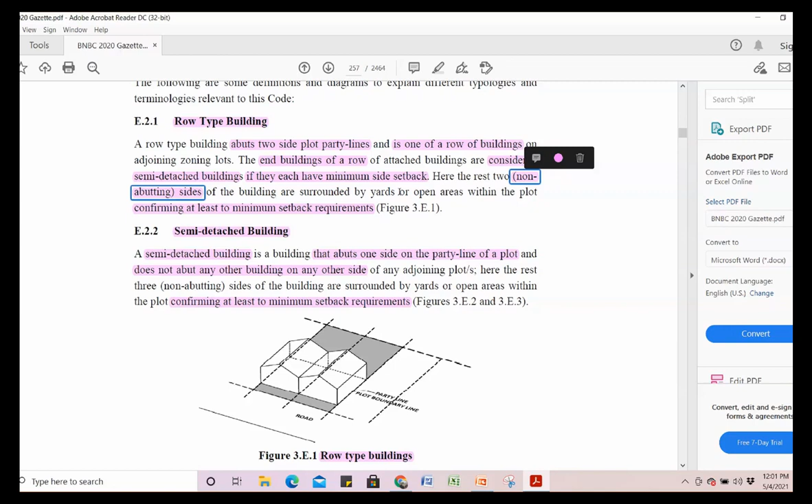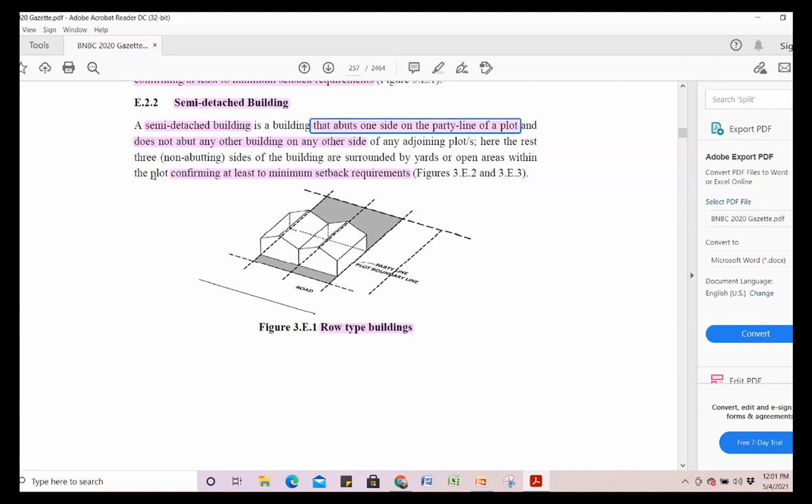Here the rest two sides of the building are surrounded by yards or open spaces within the plot conforming to minimum setback requirements. Semi-detached building. A semi-detached building is a building that abuts one side on the party-line of a plot and does not abut any other building on any other side of any adjoining plots. Here the rest three non-abutting sides of the building are surrounded by yards and open areas within the plot conforming at least to minimum setback requirements.

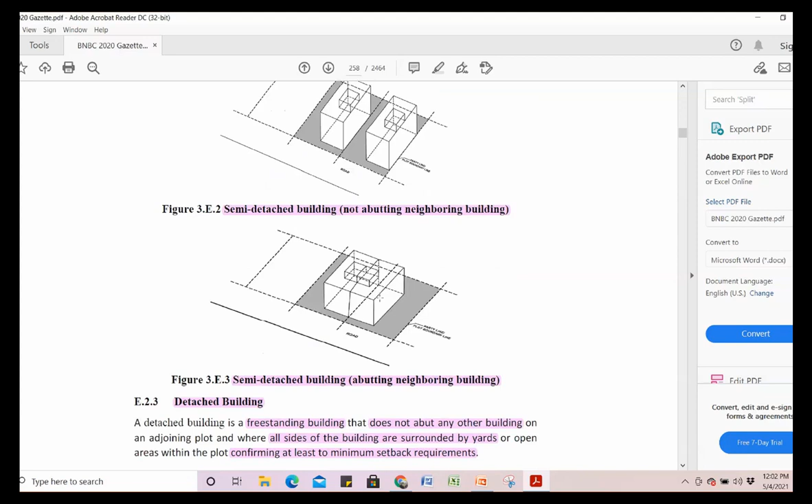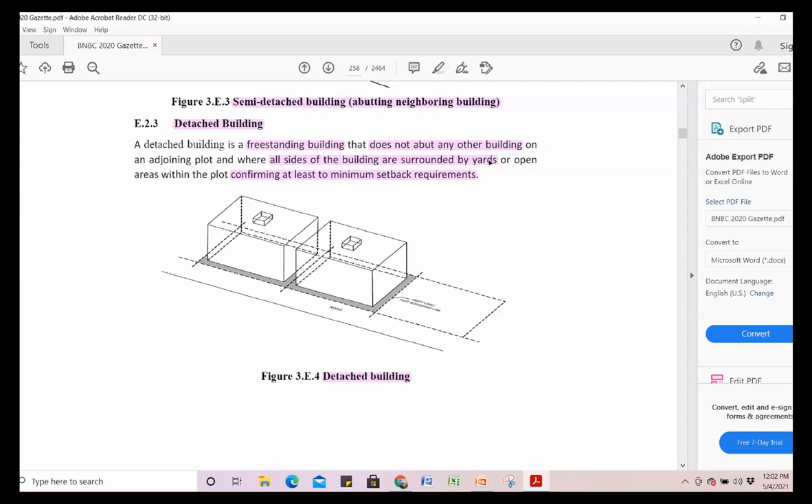So it can be of two types. One is not abutting the neighboring building, so they all are independent, and this is also a valid option, and they can even share one wall. So this can create two types of opportunities. A detached building is a freestanding building that doesn't abut any other building. All sides of the building are surrounded by yards or open spaces conforming at least to the minimum setback requirement. So this is the detached building.

Some special provisions are there for constructing walls abutting the party line, because when two owners build on the same property line, there are situations that have to be addressed. So walls abutting any party line shall have no opening, shall not contain any concealed lines like water, gas, sanitary, electricity, shall be so constructed that it remains moisture free, leak proof, and conforms to the fire safety requirement.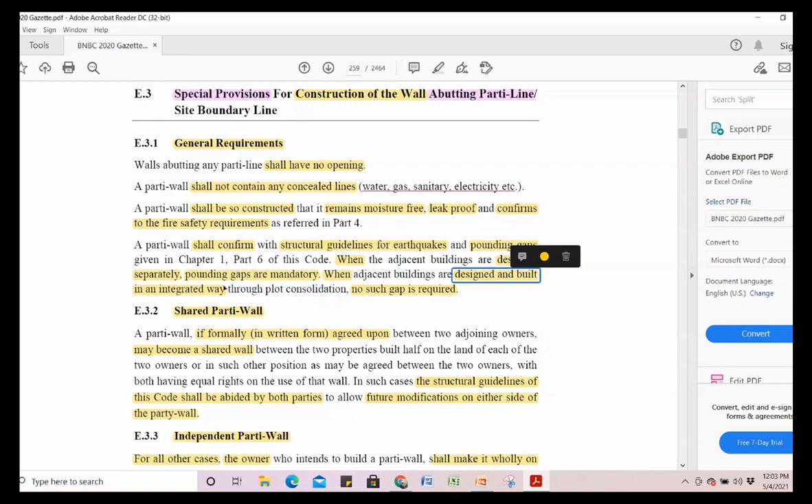A party wall shall conform with structural guidelines for earthquake and pounding gaps as referred in Part 6. When designed separately, pounding gaps are mandatory. When designed and built in an integrated way in the same project, no such gap is required. Party walls can be shared or independent.

So if there is a shared party wall, a party wall, if formally in written form agreed upon between two adjoining owners, may become a shared wall between the two properties, built half on the land of each of the two owners, or in such other position as may be agreed upon by the two owners, with both having equal rights to use of that wall. In such cases, the structural guidelines of the code shall be abided by both parties to allow future modifications on either side of the party wall.

Independent party wall. For all other cases, the owner who intends to build the party wall shall make it wholly on his own land abutting the party line. In such cases, one or two walls abutting party line shall have pounding gaps as per structural requirements of Part 6.

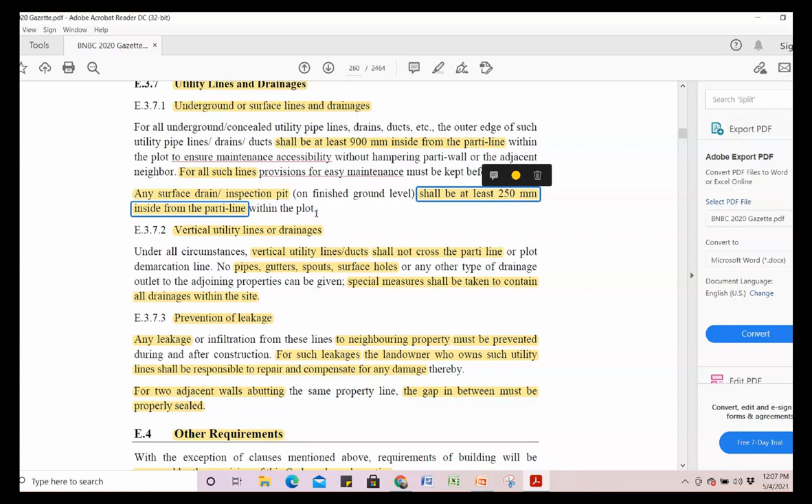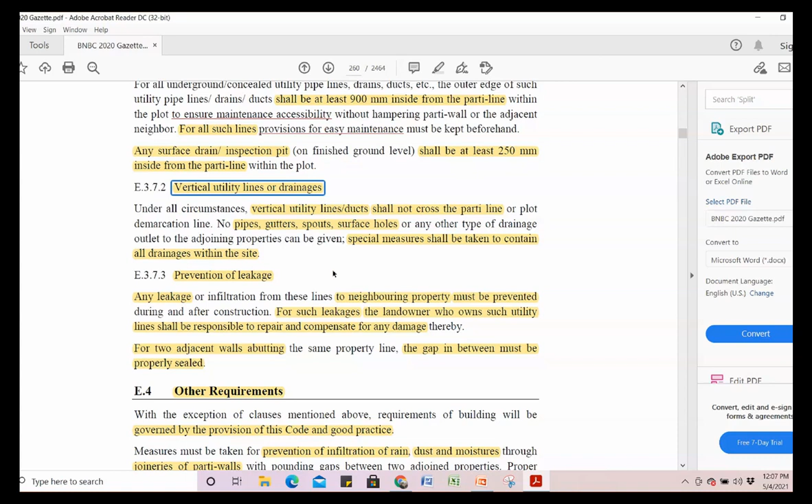Vertical utility lines and drainages. Vertical utility lines, ducts shall not cross the party line. No pipe, gutters, spouts, surface holes, or any other type of drainage outlets to the adjoining property can be given. Special measures shall be taken to contain all drainages within the site.

Prevention of leakage. Any leakage to neighboring property must be prevented. For such leakages, the landowner who owns such utility lines shall be responsible to repair and compensate for any damage thereby. For two adjacent walls abutting in the same property line, the gap in between must be properly sealed.

Other requirements. All other requirements will be governed by the provision of this code and good practice. Measures must be taken for prevention of infiltration of rain, dust and moisture through joineries of party walls. Damp proofing and termite proofing treatment will also be there as per provision of Part 6. Chemical treatment to prevent long-term growth of fungi and other microbial forms are recommended on such walls.

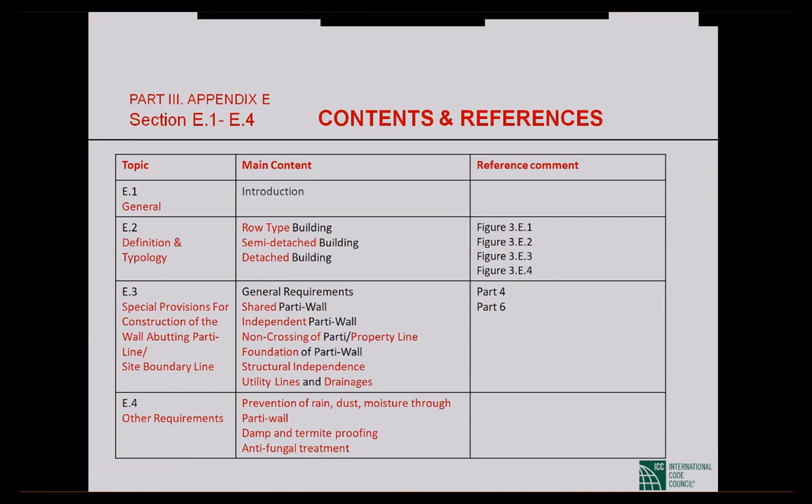So that is the end of Appendix E, and actually that is also the end of our presentation today. Thank you. I have taken a few more minutes. Thank you for your patience.